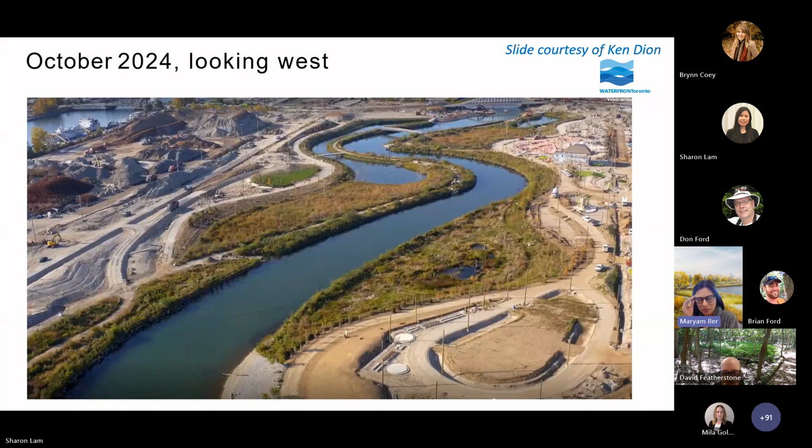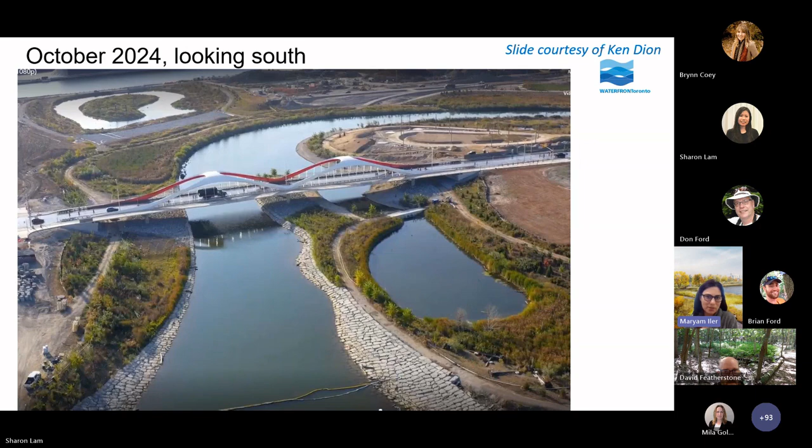I just wanted to give you a couple of air photos of the site. This is looking west across the new river channel. Keep your eye on the building on the right; you'll see there's an old fire hall there as a reference point. The next slide shows us looking south over what's called the ice management area and towards the ship channel. Right there you see Commissioners Street with the new bridges in place.

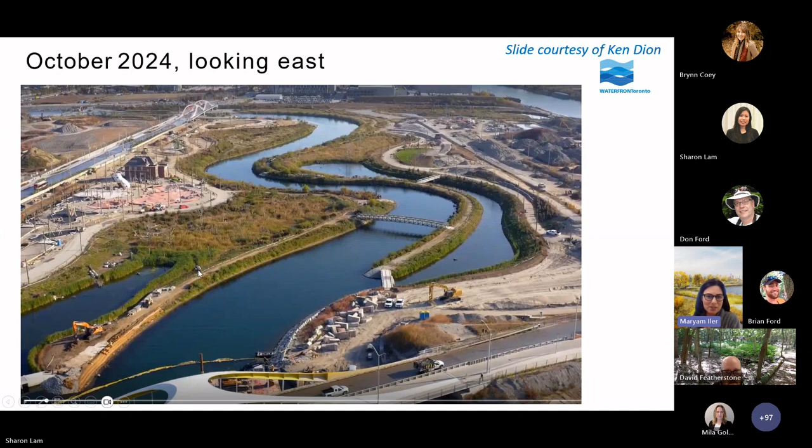And then looking east, you'll have the old fire hall there on the left, on the north side of the river, as a reference. In the foreground you can see the pedestrian bridge over the channel and the other new road bridge. The banks have been planted and things are looking quite green, and this was even just in October. By spring, I think it's going to be very exciting to see how the new habitats take shape.

But it's been a long road to get to this point. It goes back to the EAs, which were the Lower Don and then the Don Mouth Naturalization EAs, and that process started almost 10 years ago. But in reality, the move to renaturalize the mouth of the Don goes back even to the 1980s. Don Ford is going to talk about the brownfields legacy that spurred all of this movement, so I won't talk about that, but I will mention that there's been a long process with a lot of players to get to this point. It took a lot of funding commitments to get to this stage where we could have shovels in the ground for this construction.

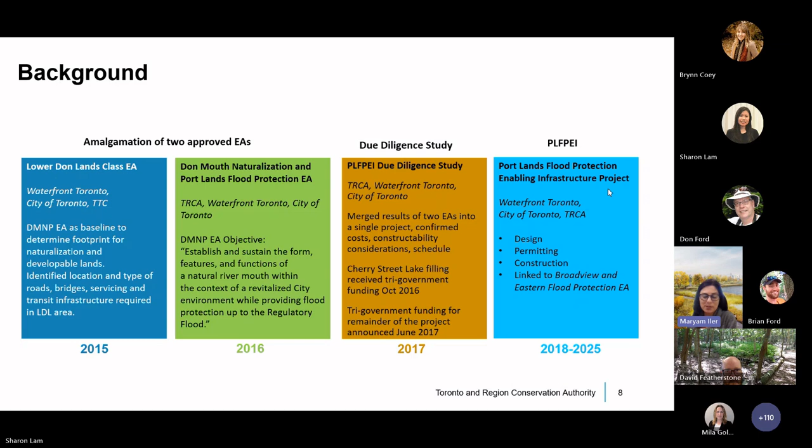And we don't have time to go into all that today, but if you would like more information about that long road that got us to this point, Waterfront Toronto actually presented to our board last Friday, the 22nd. And in their presentation, there's a lot of information about the history of not only the Don River and the old marshes and everything itself, but just the history of how we got to this point and all of the players that contributed to getting us to the enabling infrastructure phase.

A big part of how we got to this phase, although Waterfront Toronto is the proponent and supported by the City of Toronto, and they were the ones who were in essence holding the purse strings on this, our TRCA team really were instrumental in detailed design in a variety of aspects of getting the Portlands enabling infrastructure stage to this successful opening of the River Valley.

And I really want to give a big shout out to all of those people. Some are in this photo here, but they're all mentioned on the slide. In addition to the many field staff, we couldn't possibly list them all here, but they were really the people who were instrumental in helping us get to this phase.

There was a lot of work done for archaeology and Indigenous engagement, which I'm sure Alistair and Catherine could have a whole separate presentation on themselves. And then in the later stages over the past couple of years, we've been dealing with all the coordination with the city folks in terms of the long-term operations, maintenance, and surveillance of the Portlands, because it's a huge new green space asset for the city, and dealing with all of the different aspects of property and asset handover issues. And the city has been relying on TRCA for inspections and warranty.

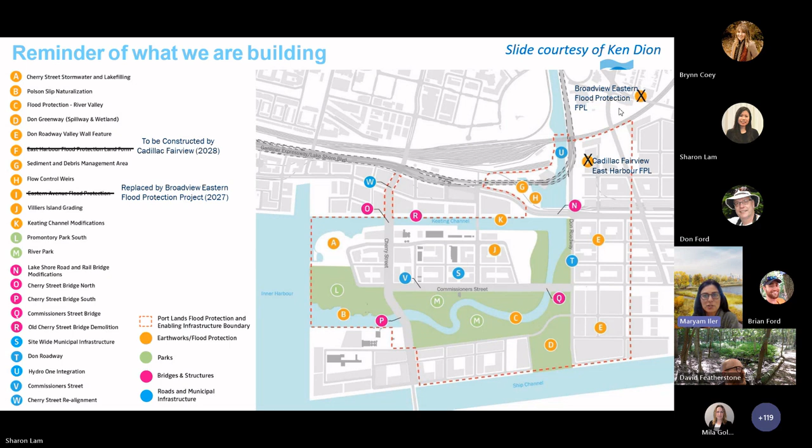So as I mentioned, the Portlands was a large endeavor, as everyone can imagine. It originally consisted of 23 separate sub-projects, and many of those sub-projects required more than one permit. A couple of the scope items were moved out to adjacent projects, particularly flood protection and landform construction, which is now being carried out on the lower side of the street there by Cadillac Fairview, or private sector, and then the Broadview Eastern Flood Protection Project, which is still under TRCA, where we're in detailed design, and that's managed by my colleague in PMO.

And so the whole purpose of Portlands was really to create all that enabling infrastructure and remove all of these lands, the 240 hectares that were still flood vulnerable. So this was the original conditions before the Portlands project started. These were all the areas that would be flooded in eastern downtown Toronto.

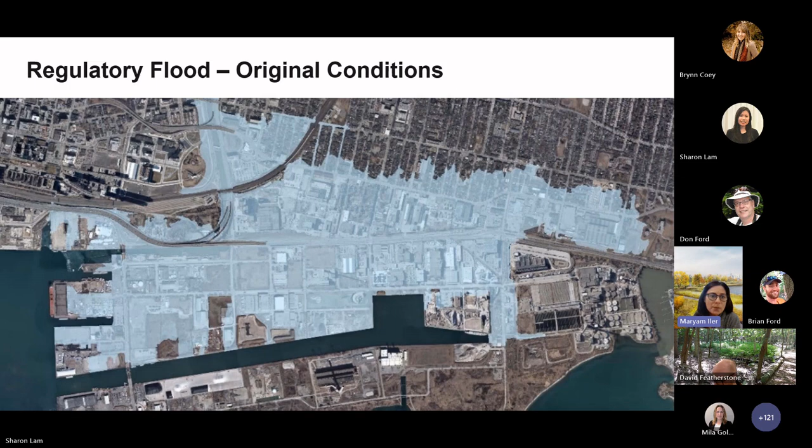In addition to that, they involved field liaison representatives for the archaeology and in all of the actual on-the-ground field work, where representatives from different groups would come out and work alongside our staff in the field to learn and to advise and to share knowledge and bring an Indigenous perspective.

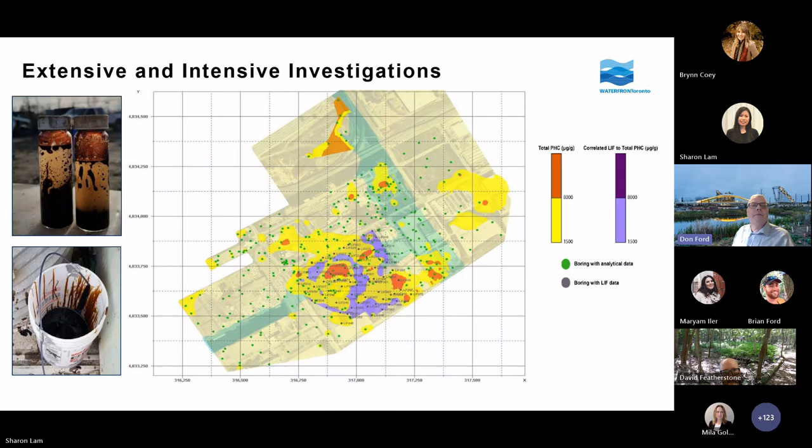And a lot of innovative technologies were used here as well to help identify the hydrocarbon concentrations, including laser-induced fluorescence, which gives essentially a continuous profile down the borehole. All that fed into what we call the CBRA, or community-based risk assessment. It's also important to realize here that the main environmental legislation that we deal with, Ontario Regulation 153/04, is based on land use.

And in this case, we're creating a river, and a river is not considered a land use. So some of the standard criteria we would use weren't applicable in this case. Also, we wanted consistent criteria across the project area, so the contractors, consultants, and ourselves in Waterfront Toronto and City of Toronto knew what all the criteria would be clearly before going in to dig the river valley.

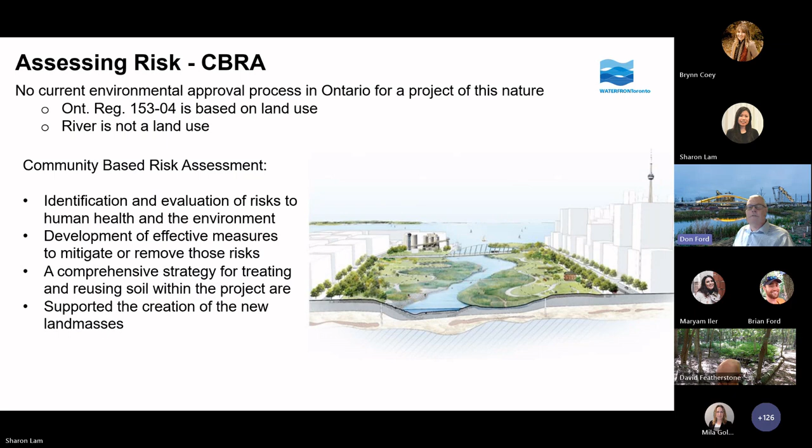And this risk assessment identified both risks to human health and the environment, both to the plants, to the fish, and also involved developing measures to mitigate or remove those risks. So risk management measures, we call them. And overall, a comprehensive strategy was developed for treating and reusing soil on the site. And you'll see later on the volumes that we're talking about and the importance of having these criteria and having the comprehensive strategy for reducing the amount of soil that had to be trucked off site.

This was a summary of the risk assessment process, just for those who might be interested. You start with the exposure assessment, looking at how much time people and receptors might be exposed to these contaminants, and how those exposures might result, whether it's through dermal contact or inhalation, or in the case of fish, consumption of plant matter, or actual picking up of sediment.

And then you look at a toxicity assessment. So you have to look at each of those receptors and look at their dose response, as we call it, for each of the contaminants of concern, and look at what the adverse effects might be. And then the risk assessment involves bringing together that exposure and toxicity to look at, do any of these contaminants of concern exceed the target? And if they do, there's some form of risk management measure required. If not, then we don't need a risk management measure.

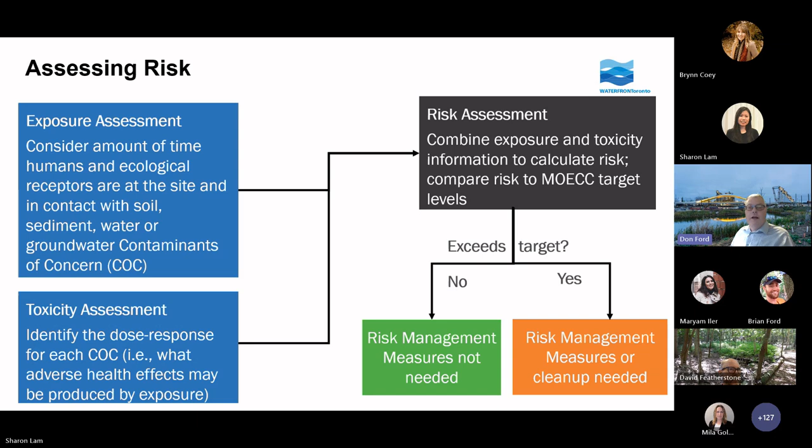So, as I mentioned earlier, on-site treatment and reuse of soil was critical because there's 150 years of fill placement as well as the industrial activity in this area. A lot of it was low-strength native peat and silt deposits. And we had to collectively excavate approximately 1.4 million cubic meters of material, and fill about 1.1 million cubic meters. That's a tremendous volume of soil to manage, especially in downtown, traffic considerations with trucks, etc.

And along with that, there's also a lot of water treatment needed because this very wet material is located right beside Lake Ontario. So even with various risk management measures in place, significant dewatering was still required and water treatment to minimize how much water had to be trucked off site.

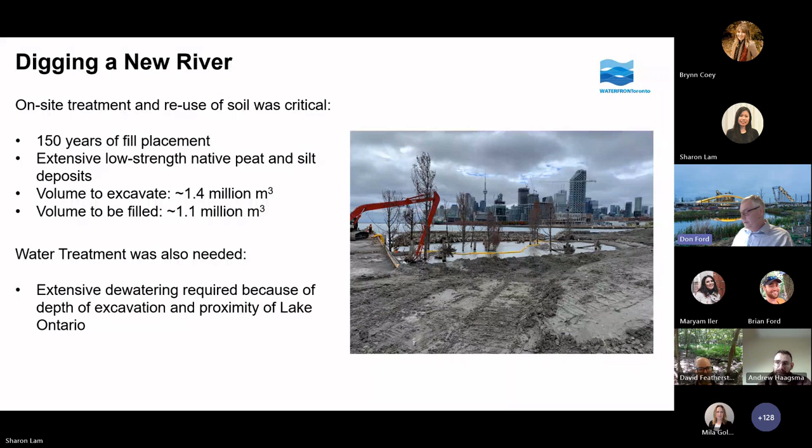So some of the risk management measures included secant pile walls. You can see the image on the upper left. Slurry walls, central top image. Slurry walls are a mix of bentonite and cement that form a more flexible wall. The secant pile walls were put where some structural support was necessary as well. And then there were cases of hybrid slurry walls involving more cement mixtures to make them stronger in certain areas.

And finally, we also utilized what's called a diaphragm wall, which is a more continuous concrete pour, much like a house foundation wall, but much deeper. And you can see by the scale of these walls that they extended in some cases down 30 to 35 meters below grade.

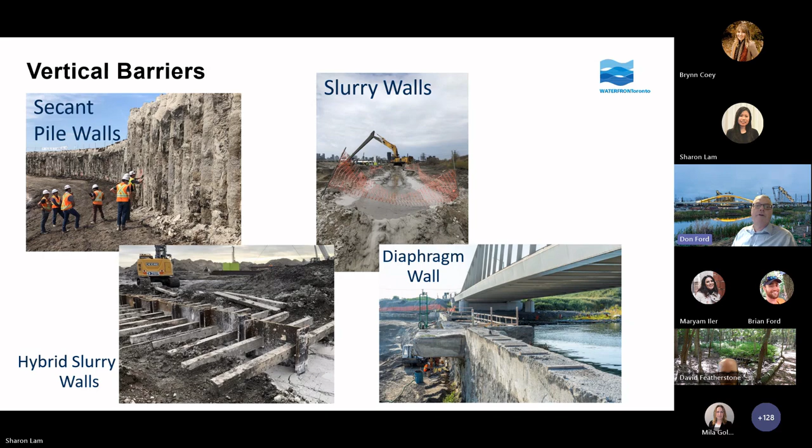We also had horizontal barriers. So you can see the river finishes on top, but we had to have a protective layer under that to make sure that if there is some erosion happening in the finishes during a flood event, for example, it wouldn't get down to the treatment layer, which underlies that protective cover layer. And that was for supplementary risk management in terms of dealing with any hydrocarbons that might get through the geomembrane, a 1.5 millimeter thick, high density polyethylene geomembrane. That's the primary horizontal barrier. But there was also below that a geosynthetic clay liner.

Why all these protective layers? It shows the degree of contamination that's still present below the river finishes, and it was very necessary to have these horizontal engineered systems in place to ensure that the plants and the animals and the people wouldn't be exposed to any of the contaminants that couldn't be addressed through the remedial processes. Now I'll turn it over to Brynn for the aquatic monitoring to see how successful all these risk management measures were.

Yeah, my name is Brynn, and as Sharon mentioned, I'm a supervisor with the Aquatic Monitoring and Management team. I started at TRCA in 2017, and since then I've had the privilege of working on this project. So today I'll be sharing the aquatic monitoring aspects of the project completed as part of the EEA and how we're tracking progress in our restoration efforts.

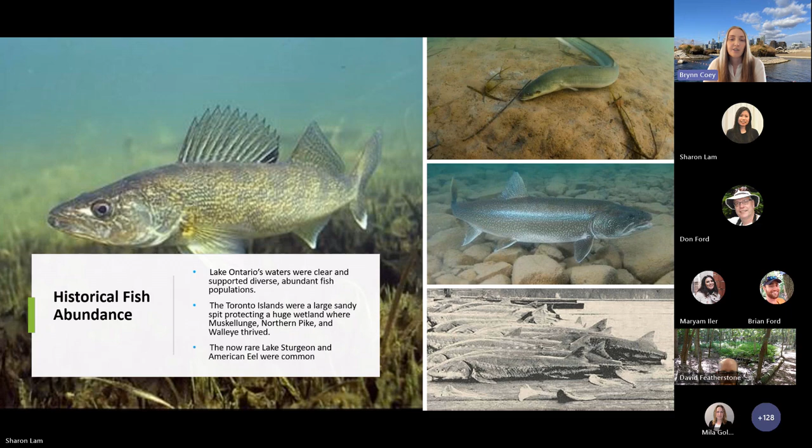Lake trout and Atlantic salmon also thrived, with Atlantic salmon being so common that they were measured not by the individual fish, but by the barrel. So there are plenty of stories about these once abundant species, but today we rarely see them in such numbers. With the historical context of the Toronto waterfront in mind, the revitalization of the Portlands focuses on restoring habitats that can support diverse and thriving fish communities while addressing modern challenges such as invasive species.

So as you can see in this image, the revitalization plan incorporates a variety of aquatic habitats. These habitats will provide quality shelter and foraging opportunities, all while managing the impact of invasive species like carp. Many techniques from the Toronto Waterfront Aquatic Habitat Restoration Strategy, also known as TWARS, were used when creating these new habitats. The creation of the strategy was led by TRCA in 2003 and outlines recommended restoration techniques. With this guiding document, constructed habitat like anchored log tangles, shallow rocky shoals, and gravel for spawning were added within the new river valley wetlands.

So TRCA conducts a large portion of the natural environmental monitoring associated with this project. Prior to this construction work starting, the aquatic monitoring team completed electrofishing transects within the project area. We had 281 samples in our database for the 10 years prior to construction at the location shown. 10% of the samples had no fish caught, and for the remainder of the samples, we predominantly caught emerald shiner, gizzard shad, and alewife, all of which are cool water species we frequently see elsewhere along the waterfront.

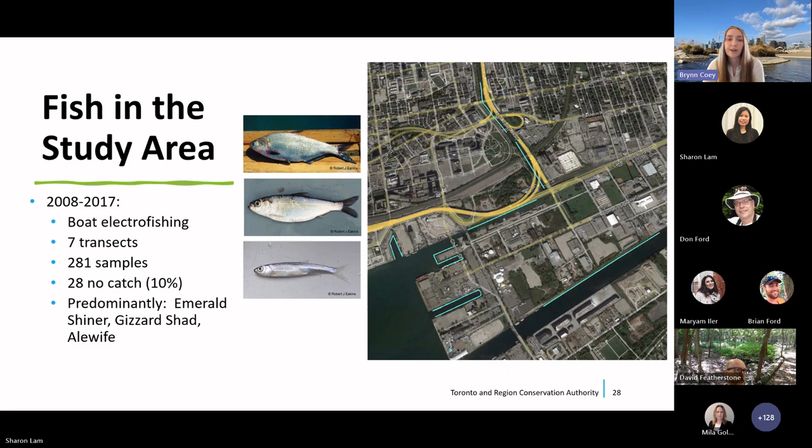So during the construction of the project, mitigation measures had to be enacted to ensure that harm to fish during construction was limited. One of these mitigation measures is to monitor the area and ensure that construction activities are not limiting the migration of spawning species. So to do this, we have been conducting weekly electrofishing surveys within the Keating Channel and lower Don River in spring and fall every year since 2018 when construction began. We are monitoring that species are able to move upstream past the construction activities to spawn and are not staging at the mouth unable to pass. There are other mitigation measures that the construction crews on site implement on a daily basis, such as sediment control and turbidity monitoring, for example.

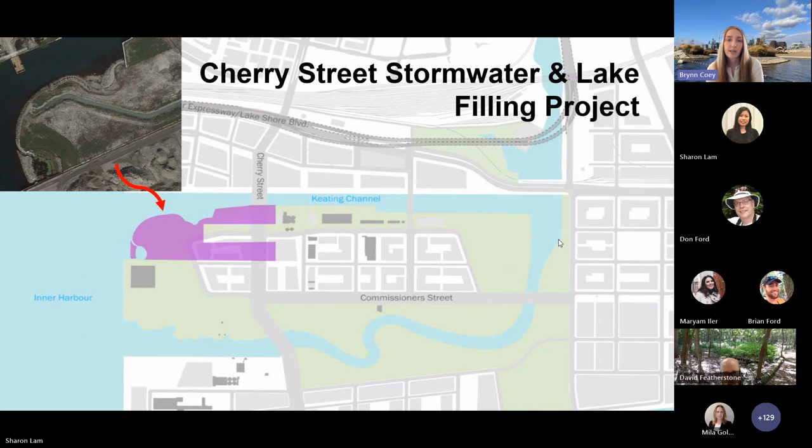So although the project is not fully complete, some components of it are. For example, the first sub-project, the Cherry Street Stormwater and Lake Filling Project, was completed in November 2019, and we've already completed the post-performance monitoring for this part of the project. So this is what the area looked like in 2017. Essroc Quay was located near the end of the Keating Channel, and then you can see where the new river mouth of the Don was as well, just underneath where it is.

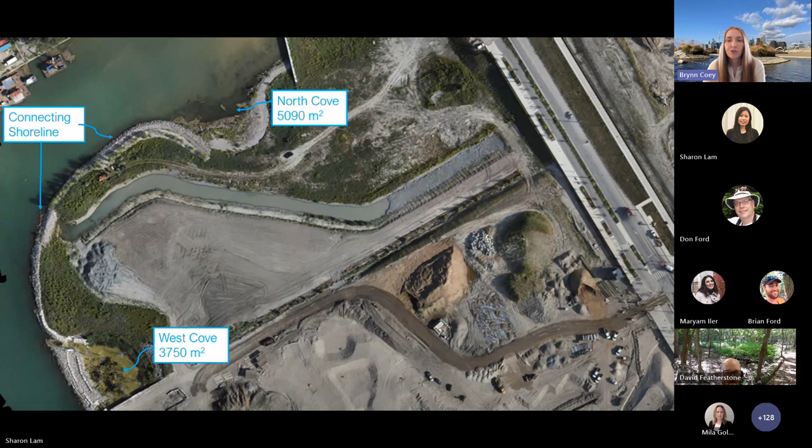So here's a picture of what is there now. There are a couple of notable features with regard to fish habitat. The first one being the North Cove. This is a berm shoal that is open to the Keating Channel. The West Cove, this is an area enclosed with 2 carp exclusion gates, and the shoreline connecting these 2 coves. This area has rocky shoals extending about 5 to 10 meters. And in this photo, you can also see a large drainage channel across the middle of the site. This channel is currently being filled in, and it was just temporary. So for both coves, there was a lot of rock and anchored wood added to the system to provide fish habitat. The West Cove was planted with native aquatic vegetation, but the North Cove was not.

So as part of the Fisheries Act authorization from Fisheries and Oceans Canada for this project, we completed fisheries monitoring. We used a variety of methods, including traps, electrofishing, and underwater video. As part of the authorization, we had to show that 3 native fish species were using each of the newly created habitats. And for the sake of time, I won't be going into all of the details of what we captured, but we did meet the conditions of the authorization for this part of the project and demonstrated that fish were using the newly built habitats.

So here's just a short video of fish in the West Cove and some habitat features. The majority of the fish in this video are largemouth bass, a native warm water species. So this is a wetland that has 2 carp gates at the entrance of it. We install carp gates to keep adult common carp, a non-native fish species, from entering the wetland, as it would stir up the substrate, making the water turbid, which makes it harder for other fish to forage and for plants to grow.

As for the North Cove that is open to the Keating Channel, we've had some notable catches in the area since it has been built, such as walleye and American eel, an endangered species. It's also worth noting that smallmouth bass, bluegill, and rock bass were not caught in any of the 144 samples collected pre-construction in the Keating Channel, but they were caught here post-construction. We knew these fish were in and around the harbor, but they weren't caught in the Keating Channel prior to this habitat being built.

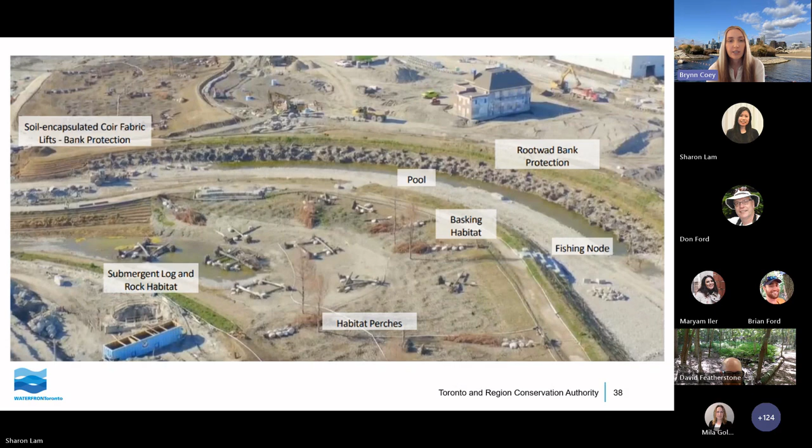So to excavate the New River Valley and add those aquatic habitat features in, it was necessary to temporarily hold back the water in the inner harbor and the Don River. So this was achieved by installing 2 plugs, one at the north end and one at the west end of the river. In January of this year, water was gradually pumped into the newly constructed river valley, a process that took several weeks. Letting the water rush in all at once would be very exciting, but it would have been tough on the new riverbed materials and newly planted vegetation that was still establishing its roots and would likely be very dangerous for the staff that were tasked for that job.

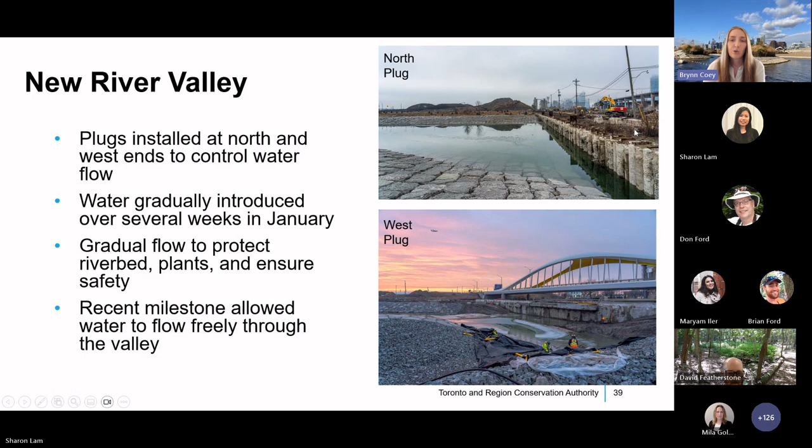So currently, construction crews are still in the process of removing the remaining plugs at the north and west ends, but the west plug is almost fully removed, and as of a few weeks ago, there's an opening in the north plug, allowing water flow through the river valley. So although the official post-performance monitoring program for this aspect of the project is set to begin in 2025, we were a little excited, and we've already started a few components of the monitoring program this year, which is good because fish were already quite interested in the area. For example, we have monitored the slip that is the new river mouth through electrofishing 45 times since 2015, and this is the first year we've ever captured northern pike and pumpkinseed in the slip.

As part of our acoustic telemetry study in partnership with Fisheries and Oceans Canada and Carleton University, we've also been tracking fish more passively. So in spring of this year, we deployed a buoy that tracks tagged fish and monitors various water quality parameters in the new river mouth in real time. We've had records of northern pike, common carp, and largemouth bass using the area. Largemouth bass and common carp are also species that we've not seen in this area prior to 2024. So this equipment is a great way to monitor fish 24/7. However, I will note that we only tag certain species to track their movements, so we must continue with our active monitoring techniques as well.

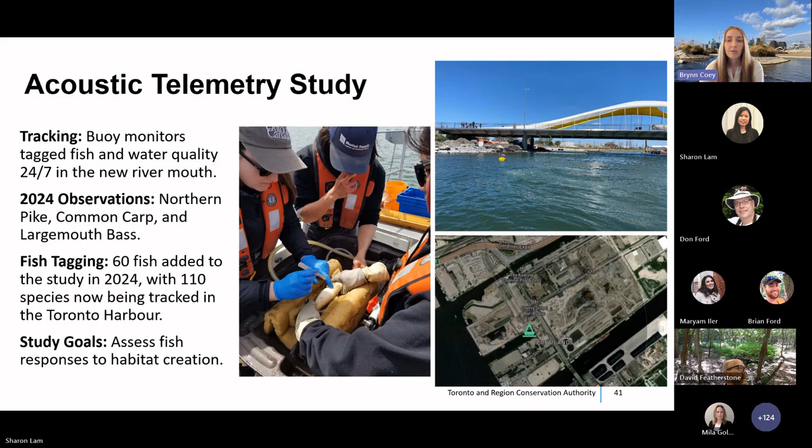In 2024, we tagged 60 fish to be part of the study, bringing us to 110 species currently being tracked within the Toronto Harbor, and the study helps monitor fish response to habitat creation. So although the river valley was not fully connected when we made these discoveries, Canoe Cove, a coastal wetland created at the entrance of the new river mouth, was, and likely contributed to us finding these fish utilizing the area so soon.

And then although the main river valley was off limits to us, our teams worked in the newly created wetlands, installing acoustic receivers to track fish movement and setting up temperature and dissolved oxygen analyzers for passive monitoring. These acoustic receivers store data for download once a year rather than providing real-time updates. So each wetland within the river valley, like the West Cove, is equipped with carp exclusion gates to prevent adult common carp from entering the wetland while allowing native fish species to pass by freely.

So in addition to the passive monitoring equipment deployed in the new wetlands, we've also conducted more active monitoring using minnow traps. This summer and fall, we set minnow traps in each of the new wetlands and captured a variety of species, including an abundance of fathead minnow and pumpkinseed, along with brown bullhead, brook stickleback, and round goby. It's important to note that minnow traps are specifically designed to capture smaller fish, such as minnows and shiners.

Given that the vegetation is still establishing in these wetlands, we intentionally avoided using larger nets or deploying our electrofishing boat, which could potentially disturb the new plantings. This approach allowed us to gather data on fish populations while minimizing the impact on the habitat restoration process.

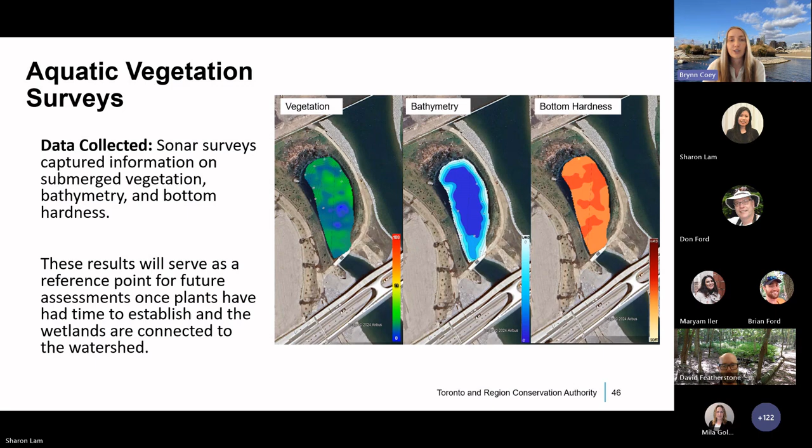And then in terms of next steps, 2025 is the official start of the 5-year post-performance monitoring program as part of the environmental assessment for this project. This monitoring program is designed to ensure that the desired environmental outcomes related to the project are achieved and are effective. Basically, did we do what we said we were going to do?

So building on this year's efforts, we're going to continue much of our current aquatic monitoring work while also introducing some new components. Some new additions will include water quality sampling and expanded aquatic vegetation and fish surveys to cover the new river valley. So these steps will help provide a more comprehensive picture of how the habitat is evolving and ensure that we're monitoring whether we meet our desired outcomes.

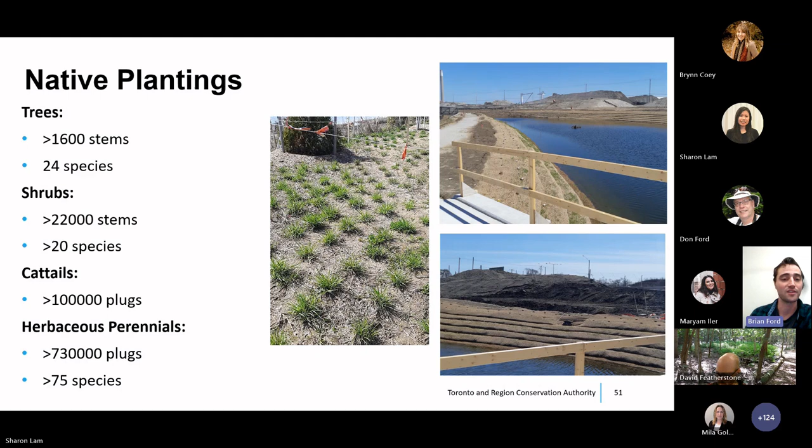So basically what I did for this vegetation survey was I collected invasive species data, basically to see where problematic species were so that we could deal with them in a timely fashion. Pretty much all of the species points that I took for these invasive species have already been earmarked for removal or management.

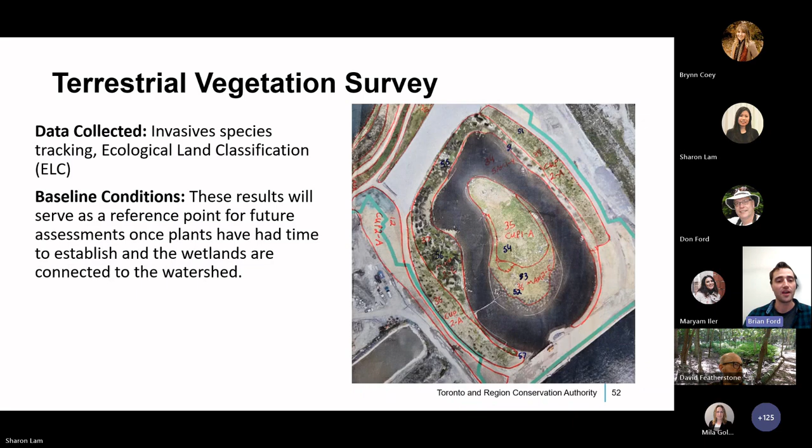And the other thing that I was tasked with doing was ecological land classification, which is actually in this image. This is an image of my field map that I took into the site with me. And you can see all the red lines there correspond to distinct vegetation communities that I delineated. So basically, what happens with ELC is plants grow in different assemblages or different communities, and so we're trying to outline those boundaries and then delineate those specifically.

So for the ELC component, we delineated the communities in red pen, as I said, and we ranked the dominance of up to 4 species in each structural layer. So like the canopy, the middle, the lower, and the ground. And we estimate a percentage of physical cover of each layer and then provide the ELC code.

Now I recorded 47 different vegetation communities of 17 distinct types. And overall, I had over 160 species that were recorded in those layers that I mentioned. Interesting to note, about 125 of those species were planted. So the vast majority of species that were identified on site were actually planted.

Of the different plant communities, there were a lot of tree dominated or woody dominated communities, forest communities, 22 of those, which represented 4 types, and they were all plantations because everything was planted. It should be noted here that some of these communities were recorded as plantations, but functionally they're going to be something a little bit different. They're probably going to turn into something like a swamp community, but because they're planted, they get recorded in the ELC as plantations.

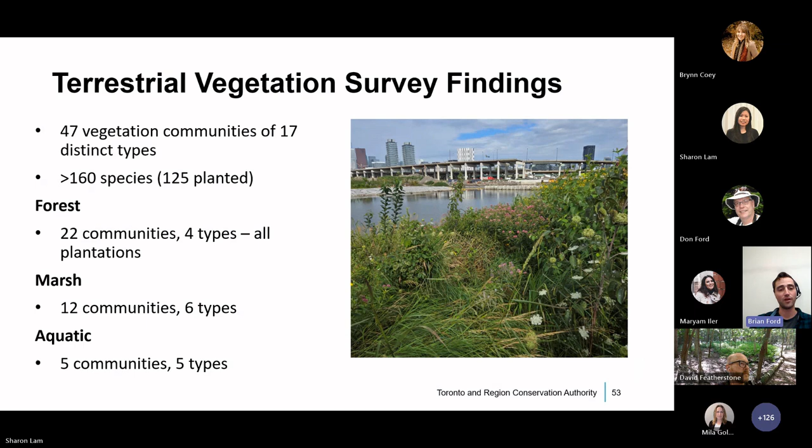There's still a lot of change that's going to occur because as part of this project, there was a lot of weeding that was done to try to help the native plantings establish, and there was also a lot of watering that was done to help with the establishment as well. So once all of those activities stop, there's going to be a lot of shifting around of different species, because what's planted is not necessarily what's going to be there long term on the landscape.

So it's going to be really exciting over the next couple of years to see what kinds of shifts occur, and what actually kind of wins out, I guess. Hopefully a lot, because the plantings that were undertaken here were so diverse. Hopefully what ends up is a pretty diverse landscape.